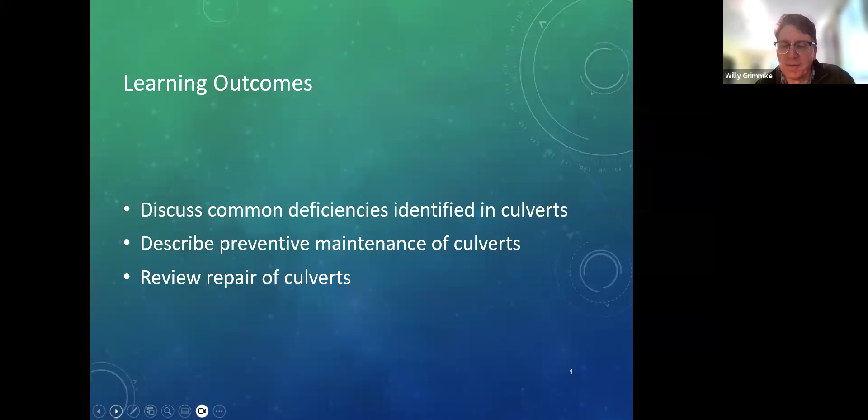So we're going to start out with some poll questions to get an idea of where we are and who's attending today. What's your primary job function? Are you a highway maintenance worker, highway maintenance supervisor, an engineer, or other? Okay, it looks like we have overwhelmingly engineers, as well as some others, and we've got about 15% from the highway maintenance community.

So next, who do you work for? Village, town, county, city, state, or private sector? Okay, we've got 4% village, 18% town, about a quarter county, 13% city, 15% state, and a quarter private sector. So we've got quite the variety here.

How long have you worked with culverts? Less than a year, 1 to 5 years, 5 to 10, 10 to 20, or over 20, lots of experience with culverts. Okay, so it looks like we've got some newbies. We got almost a third in the 1 to 5 category, and we've got almost a quarter in the over 20-year category.

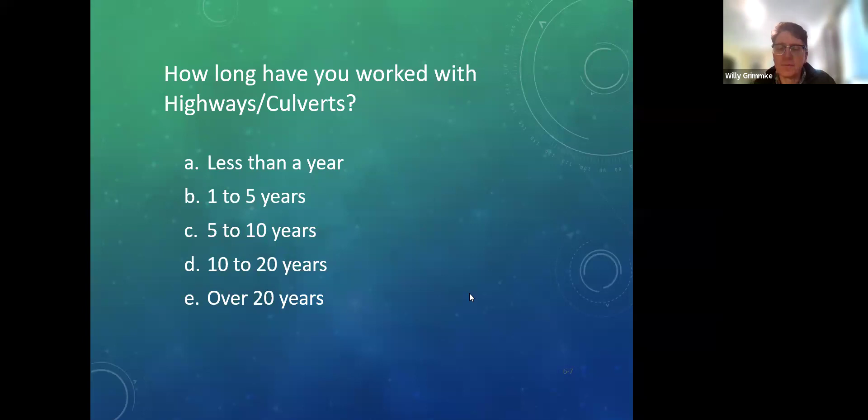So, how many culverts in the 5 to 20 foot span are in your system? If you're a public employee or you're responsible, is it none, 1 to 10, 10 to 25, 25 to 100, over 100, or I have no clue? Okay, so we've got over a third with over 100 in their inventory. We've got some with none, some with not sure, and then others with varying numbers.

Okay, so let's talk about culverts a little bit, and we're going to start out with some nomenclature so everybody's on a common knowledge base, so we know what we're talking about. Down at the bottom of the culvert, where the water flows, that's referred to as the invert. The top, the peak of the culvert, is referred to as the crown. The widest location is known as the spring line, and underneath the culvert between the invert and the spring line is an area called the haunch, which we're concerned about the bedding underneath, which is critical to supporting the culvert when it's installed.

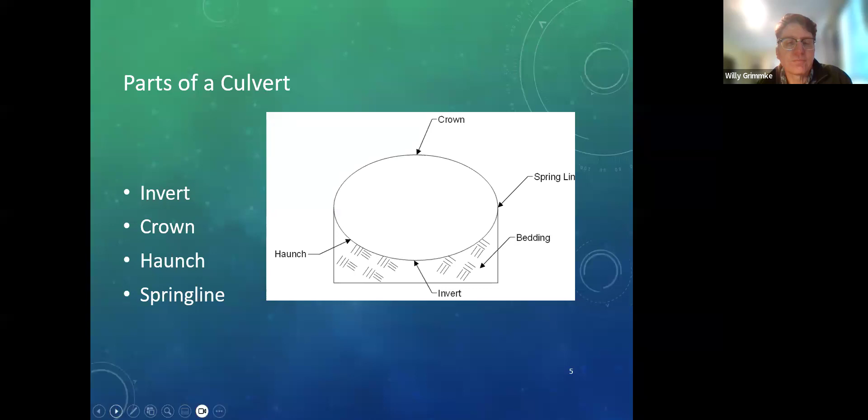In cross section, we have often, but not always, coming into the culvert, an apron. We may or may not have a toe or cutoff wall, which will prevent water from flowing in the soils and the bedding beneath the culvert.

Sometimes we will have wing walls. Sometimes we will have a head wall or parapet retaining the fill above the culvert. We will always have a barrel, which are the walls and top and bottom of the culvert.

Some culverts may have end sections in lieu of wing walls and aprons. Precast or prefabricated sections of culvert will have a joint that will extend radially around the culvert.

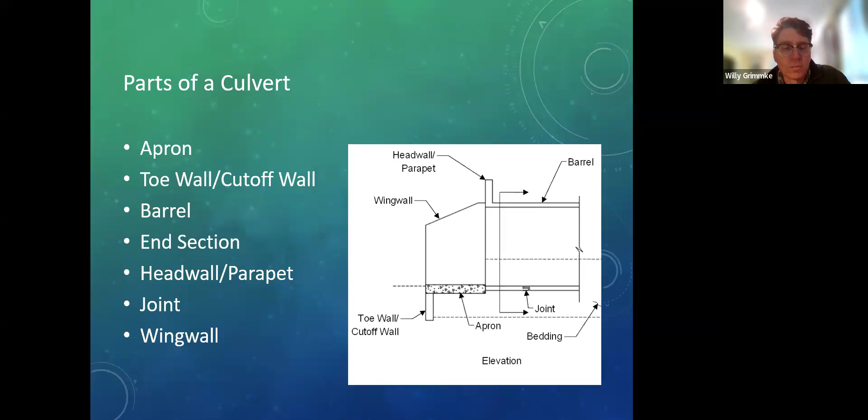Culverts come in a variety of shapes. They may be round, they may be elliptical, both horizontal as shown in the lower left, and sometimes there are vertical elliptical culverts, and these are dictated based on the geometry of the stream channel and what's crossing above and below. We may have box culverts, as shown in the center top photo and the center diagram.

And in the center diagram, we have a bottomless culvert, and those are becoming much more common with the environmental folks wanting us to retain a natural stream bottom as much as possible.

We may also have, as shown in the center bottom diagram, metal boxes. We may have bottomless metal arches, and we also may have plate arches or pipe arches, which is the odd kind of shape in the lower right.

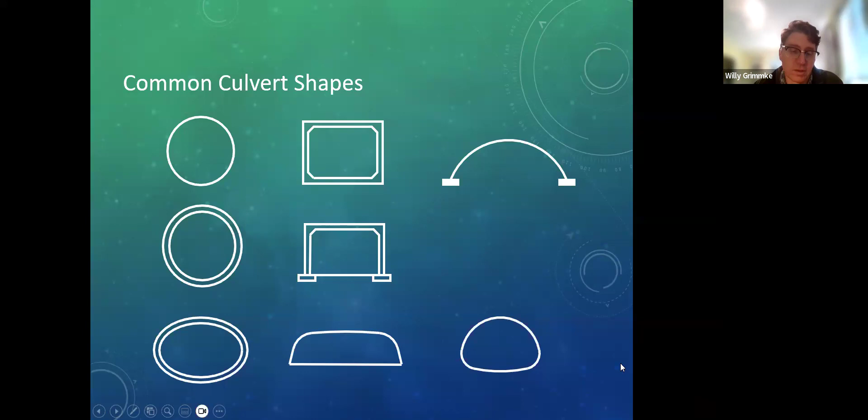Now, culvert materials. Common material is concrete. Concrete can come in a variety of shapes. It may be precast. It may be cast in place.

Concrete, but in and of itself, is rigid, and that provides the support. However, it needs to be adequately bedded, and in upcoming slides, we'll show some of the issues with bedding or poor bedding and what indications you'll see in culvert distress if the bedding is not done correctly.

Nice thing about concrete is it has smooth interior, so you get good hydraulic characteristics through it. For round concrete pipe, they're typically joints in 4 to 8 foot spacing, and sometimes concrete may be skewed, particularly with box culverts.

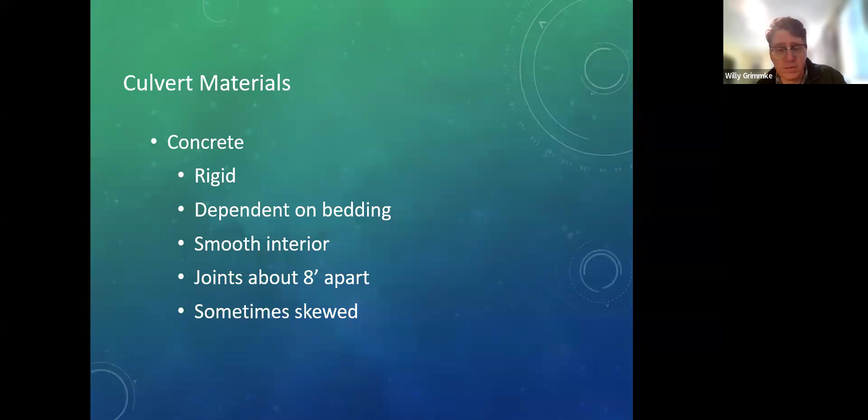Here's some photos of concrete types. We have round in the upper right, and we have a bottomless precast box on the lower right. We can use horizontal elliptical in low clearance situations. There are some manufacturers that make precast concrete arches, and cast in place concrete boxes are sometimes built also.

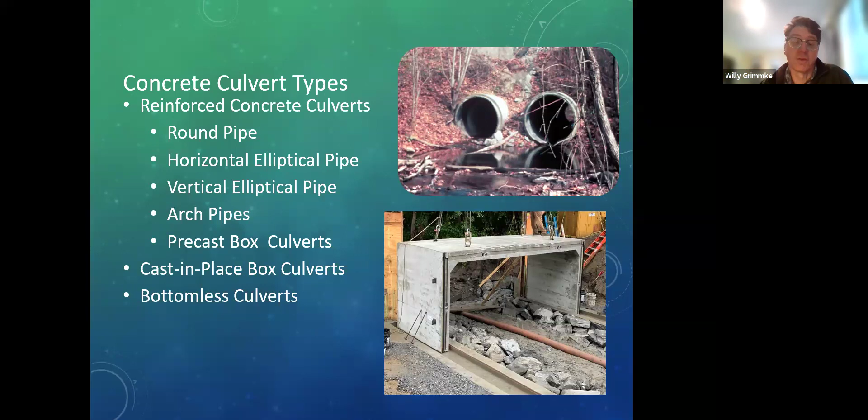We move on to culvert materials and corrugated metal, which is fairly common, although for smaller diameters, corrugated plastic or corrugated polyethylene is becoming more common.

In this particular case, the materials are flexible, and they will flex and bend with movement and settlement in the soil. This makes the installation and compaction of the surrounding soil critical for the long-term structural performance of the flexible culverts. The soil is actually providing the vast majority of the load carrying capacity, and the flexible culvert

is essentially acting as a form for the backfill and compaction of the soil. With the corrugated metal pipe, the corrugations provide a rough flow surface, which may reduce flow a little bit. Typically, the joints are about 20 feet apart

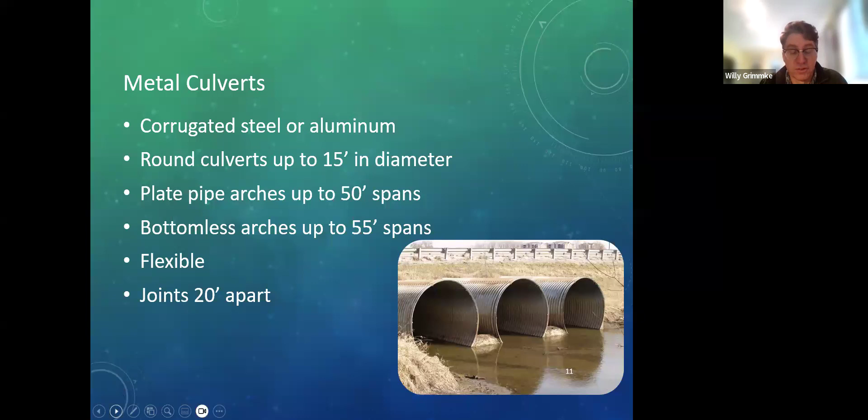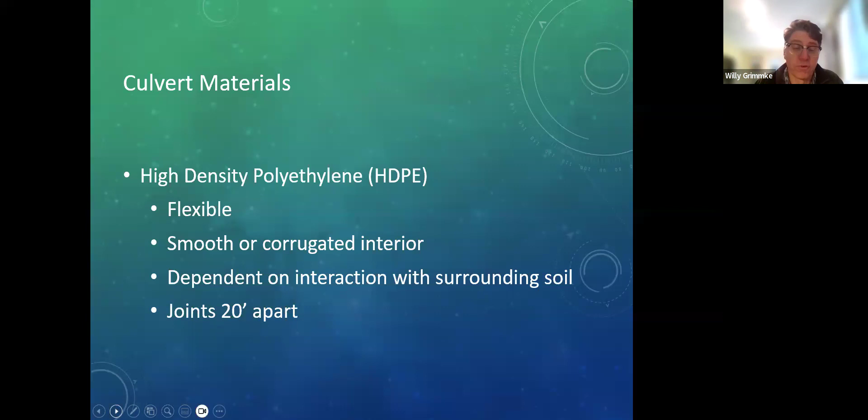I talked about polyethylene. Again, like metal, it's flexible. It may have smooth or corrugated interior, and very much like the metal, it is highly dependent on interaction with the surrounding soil. In both of those cases, during installation, soil compaction of both the bedding and backfill is critical to the long-term performance of your culvert pipe.

So I can't emphasize enough proper installation and maintenance necessary to make the culvert last as long as you're planning it to last. And proper maintenance can delay or prevent complete open cut replacement.

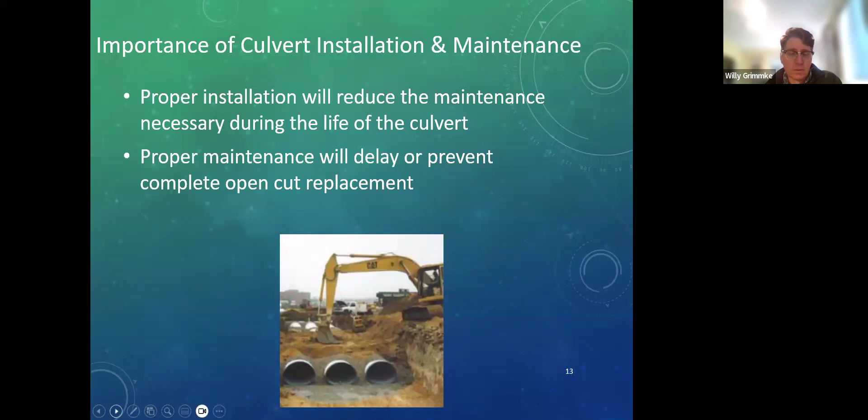Common defects that we often encounter in culverts are debris and siltation, which can impair the ability of your culvert to pass water as it's supposed to. We can get leaking joints, and those leaking joints can lead to settlement and sinkholes. We can get scour and undermining at the inlets and outlets, due to how the culvert is situated in the channel, or due to accumulation of debris at the inlet and outlet.

We can get damaged coatings in the case of metal pipes. They're typically galvanized, and that coating protects the pipe from corrosion and other deterioration. We can get invert damage or deterioration, which may be due to corrosion or damaged coatings, and in concrete and plastic pipes, it could be due to abrasion based on the bed load.

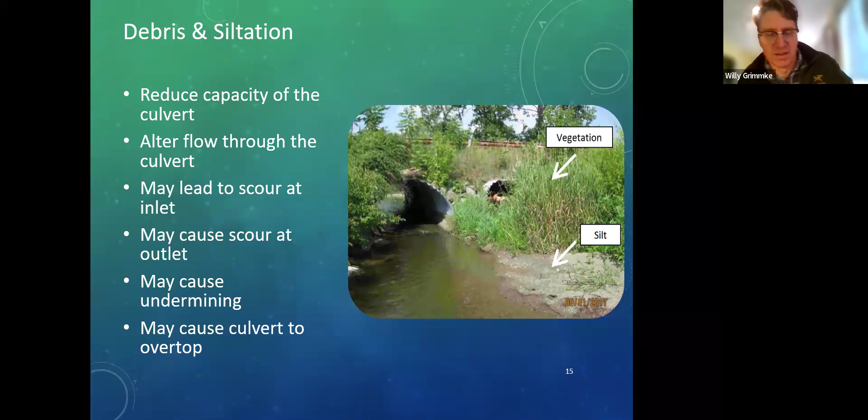We may be getting soil in our culverts, and if we get soil in our culverts, it can and will reduce waterway capacity. Now, there may be a few causes, and it may be on purpose. The causes could be hydraulics of the stream, where we've got some aggradation and the stream is tending to deposit soil in the culvert. We may have joints that are failing or an invert that's failing, and that could be causing soil in the culvert. However, we may have installed it that way, with an oversized culvert that's embedded to create as much as possible a natural stream bottom in the culvert.

You need to know whether this was accidental or on purpose. And if it was on purpose and the culvert's sized adequately for soils in the bottom and a natural bottom, that's fine. If it wasn't, and you have something going on, you're probably going to need to clean it out with some regularity so it will continue to accommodate the flow it's designed for.

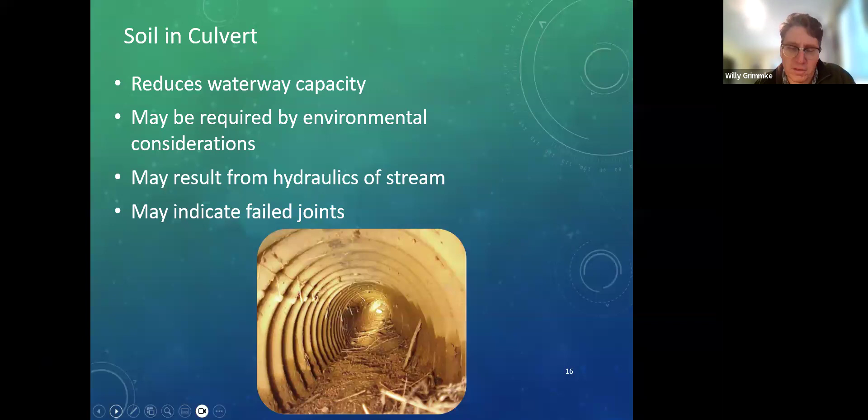Now, debris accumulating in a culvert can be problematic. This was a case where there was a release due to a dam failure, and it carried a lot of debris, which plugged one of the barrels in a box culvert pier. You can see there's a fuel oil tank as well as a lot of vegetation jammed up underneath here.

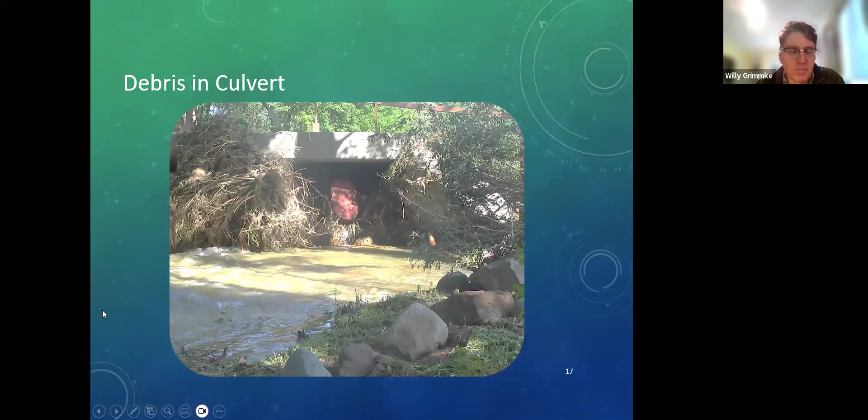Now, I cannot say definitively that had the debris not accumulated there and clogged it, the culvert would not have overtopped, because it was a pretty significant release. However, the debris did increase the probability of overtopping, and as a result, we now have a crossing that's no longer working, and that required emergency work on the part of New York State DOT at the time, to repair that and get the road open.

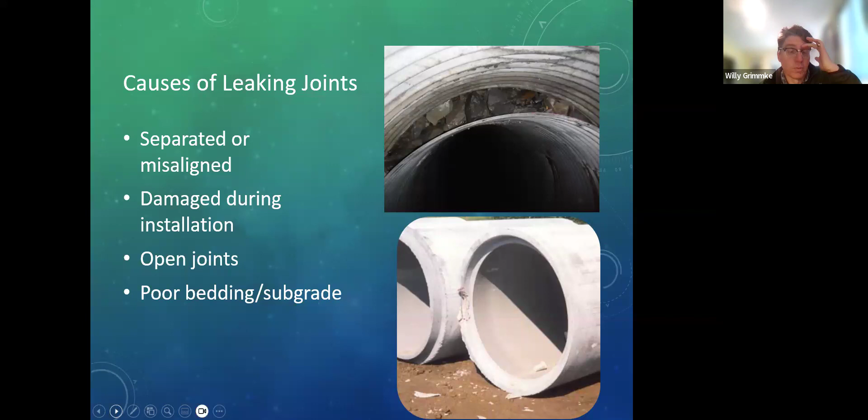Now, the joints may also be open due to poor bedding or subgrade, or it may be a situation where we've got a culvert under a fairly substantial fill, and the soils that the culvert is set on settled as a result of that fill. So we want to be conscious of that when setting culverts, because if we have a lot of settlement, joints could open up.

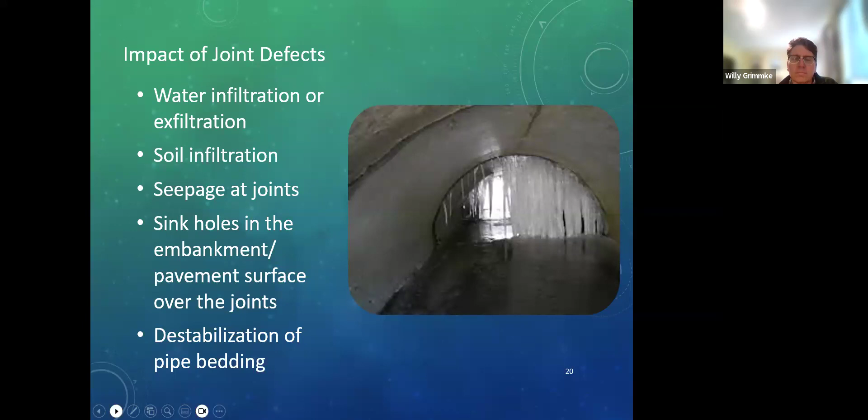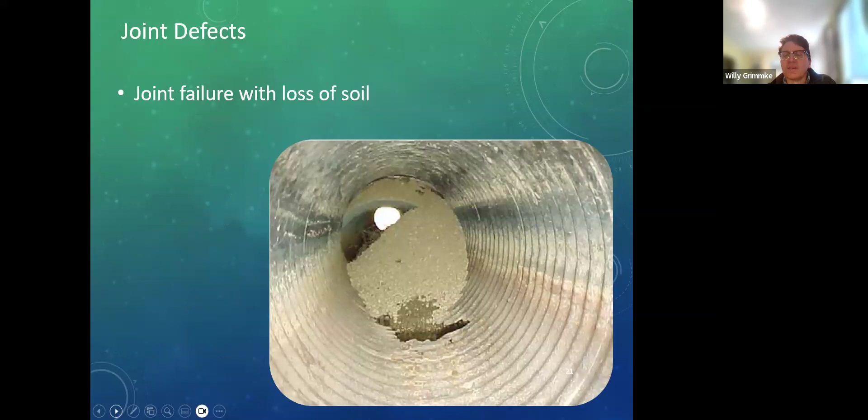So here's a case where we had a sinkhole, and the road was recently paved, and the vibration from the paving operation may have loosened up some joints. With the subsequent rains, soil washed out, and that little 2-inch diameter hole was a 4-foot diameter sinkhole underneath the pavement where soil was washing through.

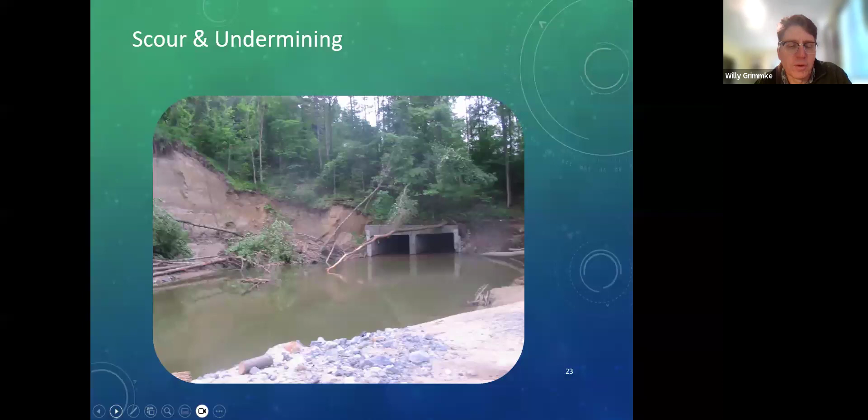We could get scour and undermining, and this was discharged downstream of a box culvert, and the heavy flows coming out of this box culvert washed out this bank down below. So often with our culverts, we'll want to do something to abate our flows a little bit, calm things down a little bit, so we don't have erosion problems.

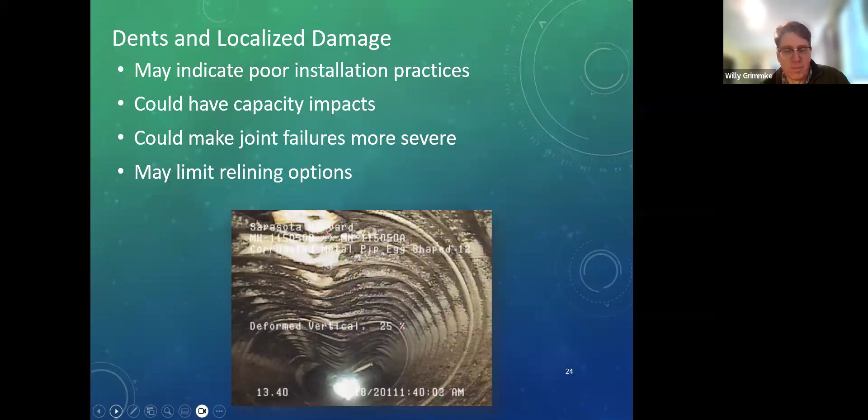We can have dents and localized damage, often due to poor installation practices. This particular case, it looks like they backed the track hoe over it, and this can have significant capacity impacts, as it may squeeze down your waterway opening. This can also limit our relining options. If we can't dig it up and replace it, slip lining isn't something we're going to be able to feasibly do. And here's another pipe with a deformation.

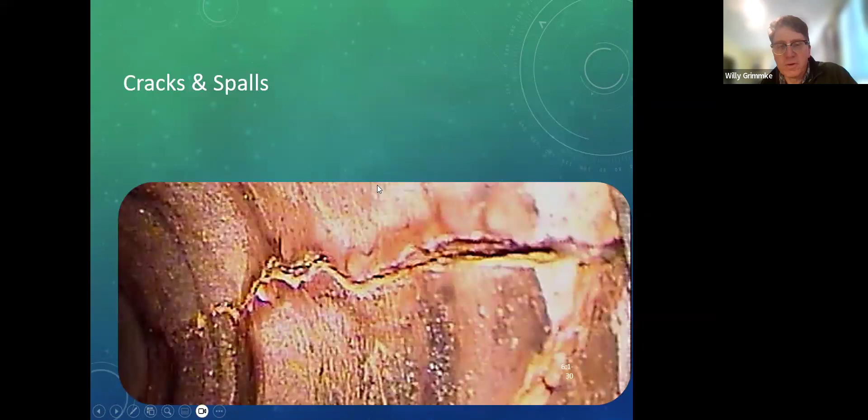With concrete pipes, we can get cracks and spalls. Now, how the cracking exhibits itself indicates what's going on. If we have longitudinal cracks at 12, 3, 6, and 9 o'clock, it's probably due to poor side support. If we have longitudinal cracks just outside the inverts, but parallel, it would be due to poor haunch support. And then with uniform side support, we're unlikely to get longitudinal cracking.

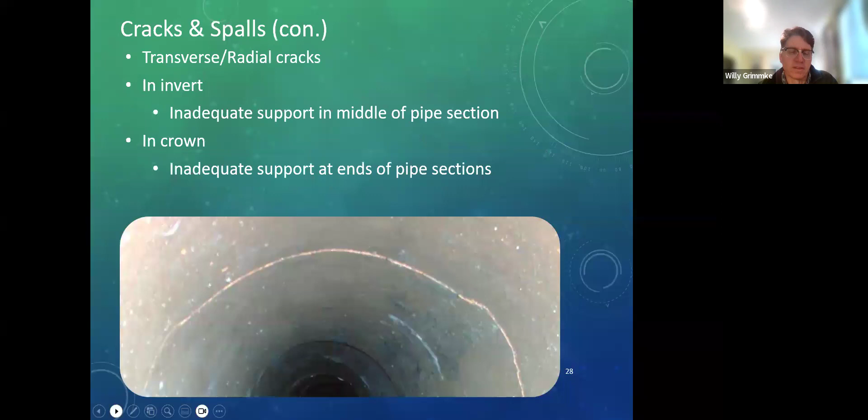Radial cracking or transverse cracking, the location will depend on where we're lacking support. If it's in the invert, we have poor support in the middle of the pipe section. If it's in the crown, we've got inadequate support at the ends, as you can see in this illustration. If uniformly supported, it should sit well. If we don't have support in the middle of the pipe between the bells, we'll get a broken belly type crack. And if the ends are not supported, we'll get a broken back type crack up in the crown of the pipe.

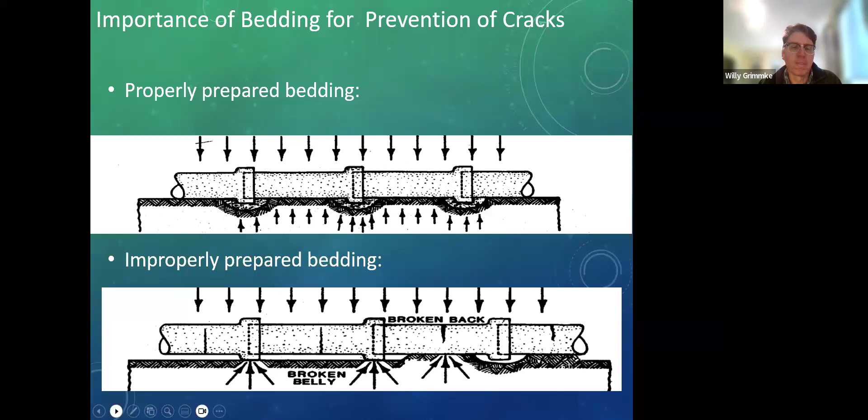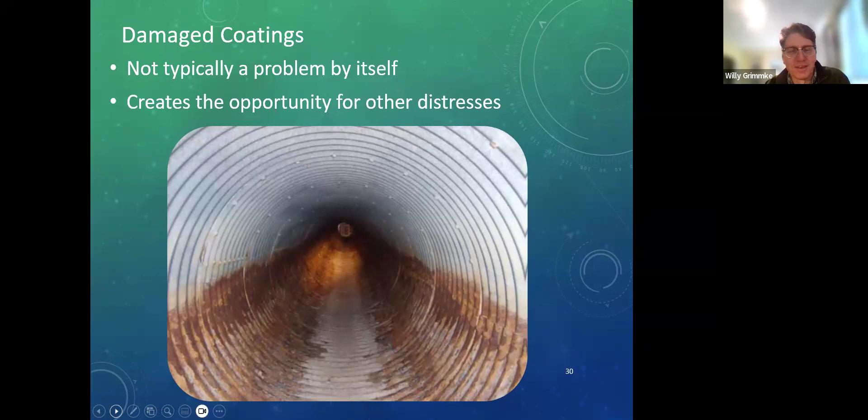Damaged coatings. The damage of the coating in and of itself is not typically a problem. However, it will lead to problems with corrosion. So corrosion can get started when the galvanization is gone. And I bet you can guess from the photo where the normal high water line is for flow in this particular culvert, because it looks like from the spring line up, the galvanization is pretty close to pristine, and below, not so much.

Once you have loss of coatings, corrosion will often start, and that will exhibit itself as pitting in the metal. Corrosion is typically due to acidic or saline water, or if your metal pipe is buried in soils with low electrical resistivity. One of the other things that can exacerbate corrosion is loss of coatings due to abrasive bed loads. If there's a lot of sand and gravel washing down the creek at high velocity and chipping the galvanization off, corrosion will get going.

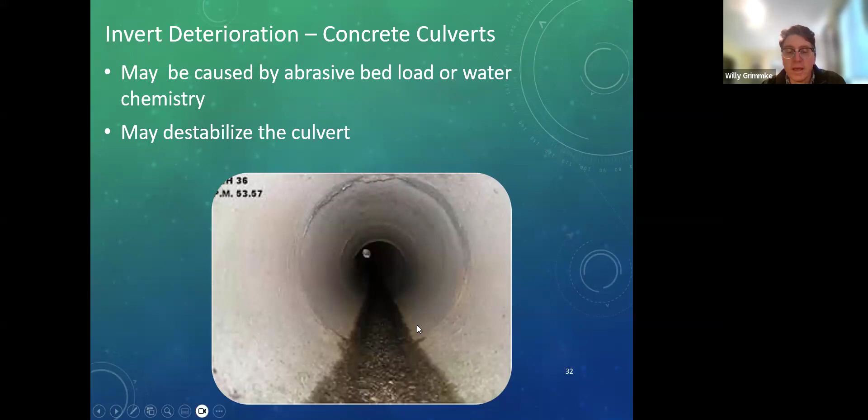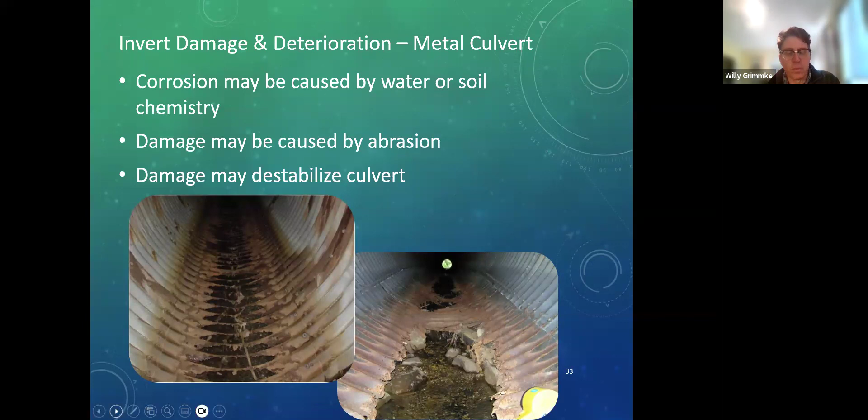And that can lead to invert deterioration, both in concrete and metal pipes. It can be caused, in concrete, by abrasion in the water or water chemistry, and over time, this deterioration can destabilize the culvert. In metal, water or soil chemistry, damaged by abrasion, and again, it'll destabilize the culvert because it's discontinuous and there's nothing supporting the bottom, which can lead to collapse in time.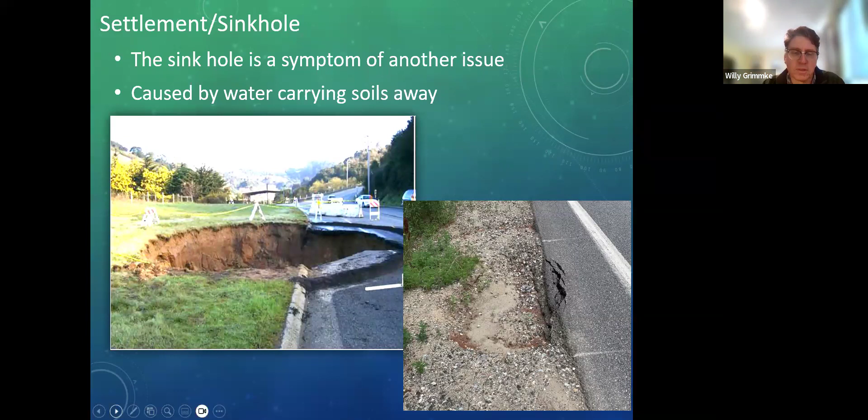If we have settlements or sinkholes, as shown in the photos, it's a problem for our roadway, but that's an indication that we have something going on with our culverts that's taking the soils away. So it may be something like a failed invert or failed joints. We'll need to deal with that problem first before we deal with the actual sinkhole repair. Let's get to the root cause of the issue.

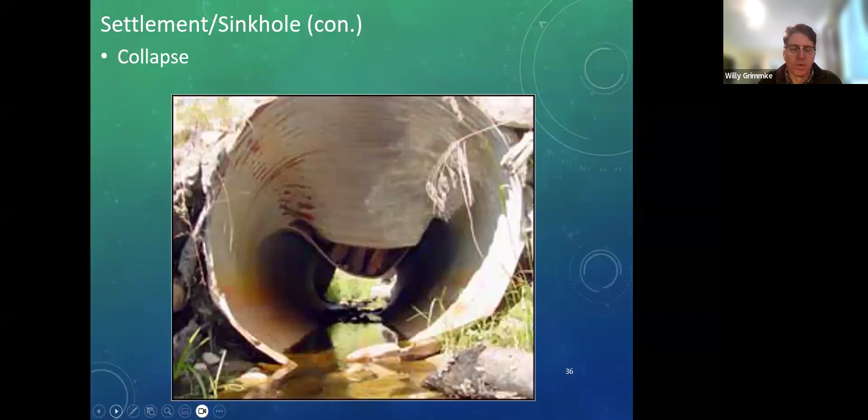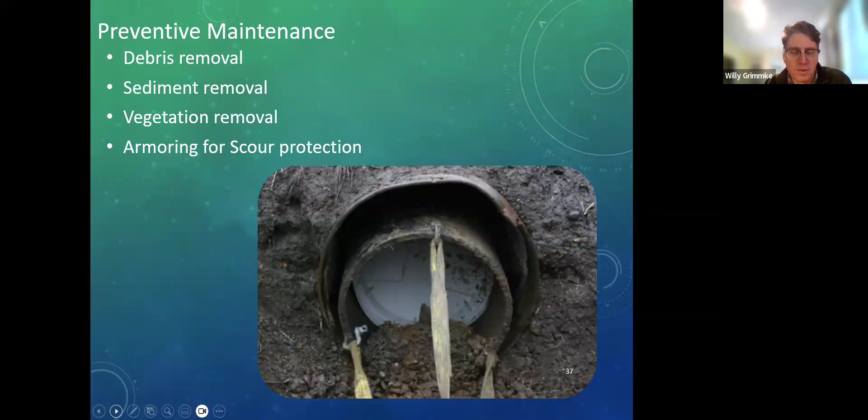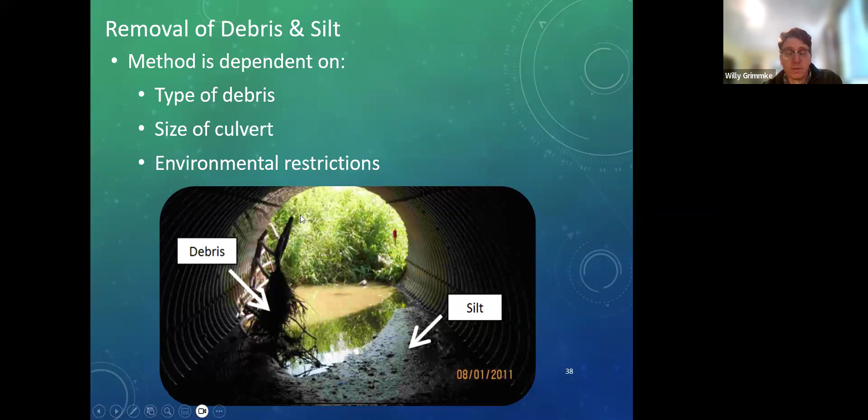So preventive maintenance: one of the things we want to do is get rid of debris, sediment, vegetation, and maybe armor for scour protection. As we talked, the debris will impair our waterway capacity. So how we're getting rid of silt and debris will depend on what it is, how much room we have to work, and what our environmental restrictions are.

So things we want to consider: environmental. Do we need to contain that silt and debris, or do we have an area to capture it? Is it a confined space? Do we have contaminants in the water?

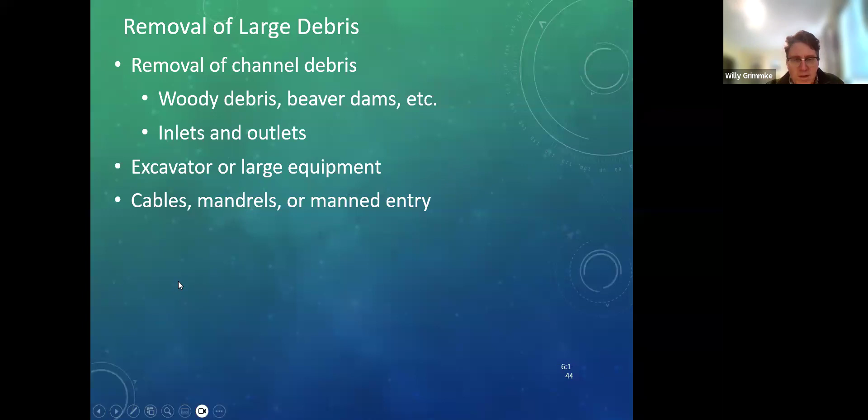So removal of large debris - do we have things like beaver dams, logs, woody debris? That often accumulates at the inlets and outlets, and often we can use an excavator or large equipment for that. Sometimes we have to go with manned entry. Sometimes we use a cable, grapple, mandrel to unplug culverts.

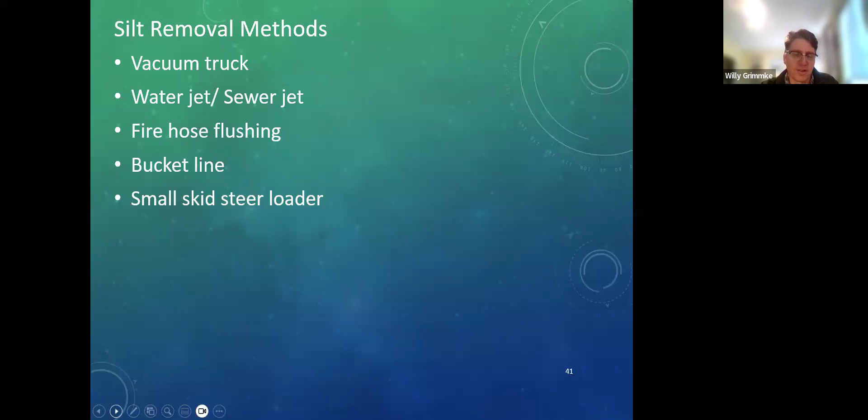If we have silt and smaller spaces, we may need to rely on a vacuum truck, a water or sewer jet, flushing it out with a fire hose, using a bucket line. If we have enough space and the appropriate permits or dry conditions to work, we can use a skid steer loader. I was talking with a colleague who was the bridge engineer from the state of Colorado, and he was telling me his maintenance folks, as much as possible on state roads where they had room, like to have the box culverts sized large enough that they could fit a skid steer in to remove debris.

If we have scour at the outlet, it depends on the severity of the scour how we repair it. You generally want a hydraulics engineer consulting for the appropriate methods and materials. If we're putting in riprap, we want to make sure it's large enough that it's not going to wash downstream in the next storm event. And if we're placing any kind of fill, environmental permits may be required.

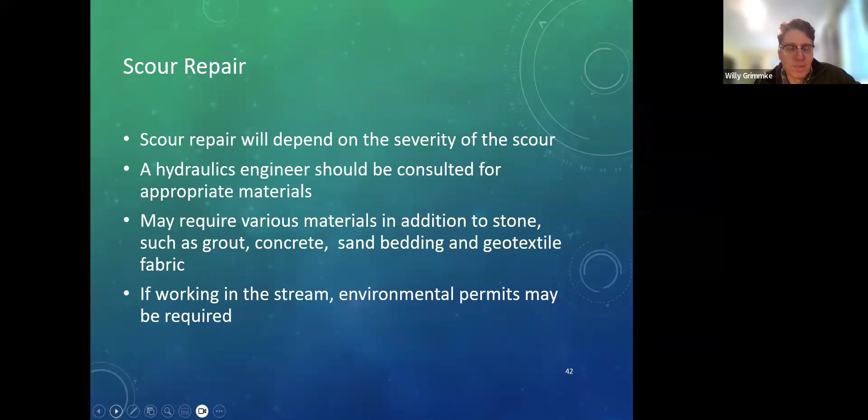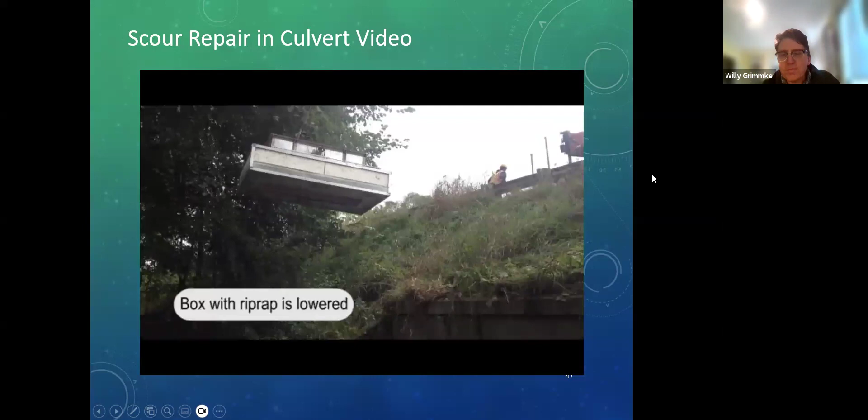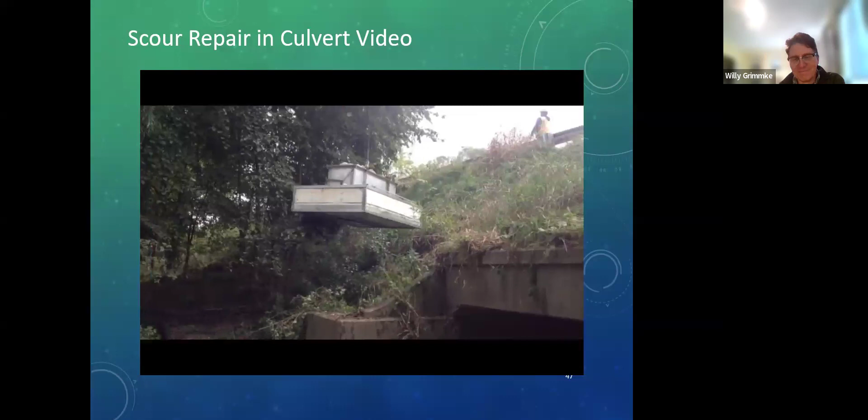Here's a video from Michigan DOT. They MacGyvered and built their own piece of equipment for placing riprap in a bottomless culvert. They've got this box that they can lower, because you're not going to get anything inside a box culvert with a track hoe.

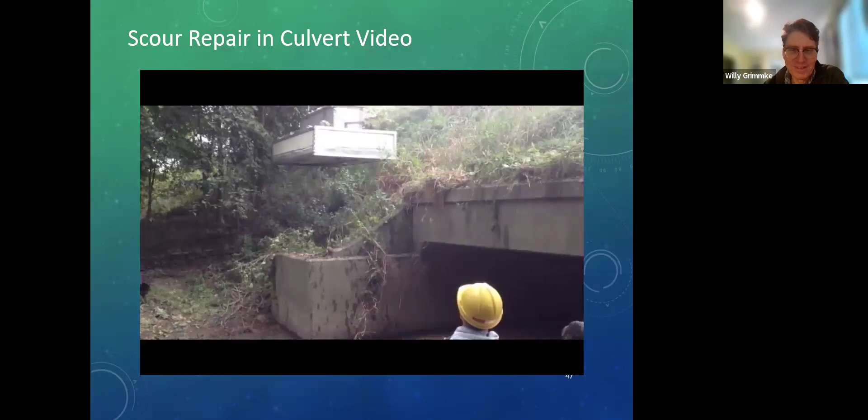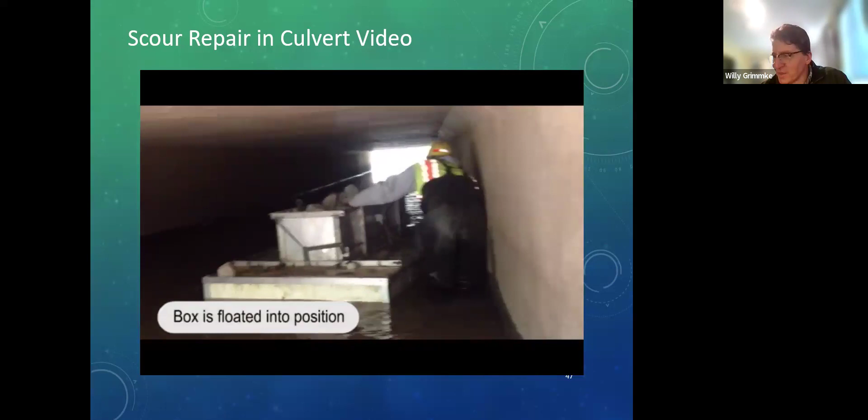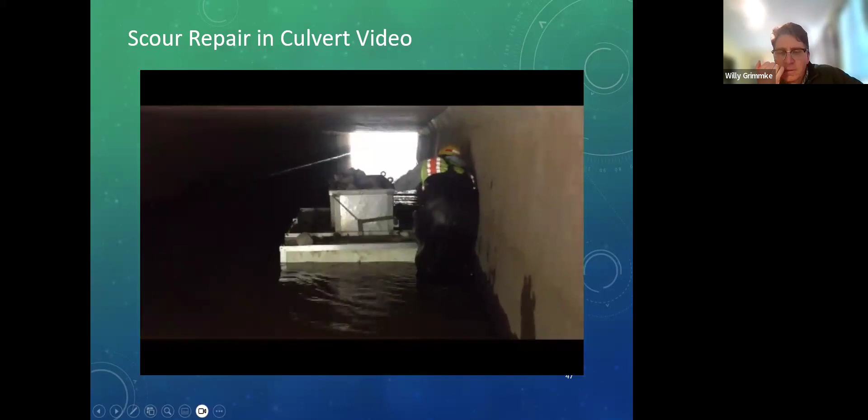And now it's being floated into position, and dropped into place.

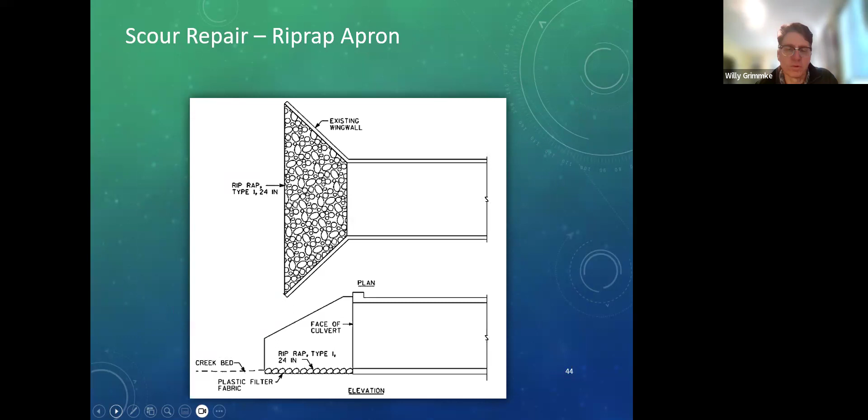That's for internally. For externally at the inlet and outlet, riprap can be placed, which will minimize or reduce both fill-in and future formation of scour holes at the inlet and outlet. In some cases, a concrete apron may be what's called for rather than riprap.

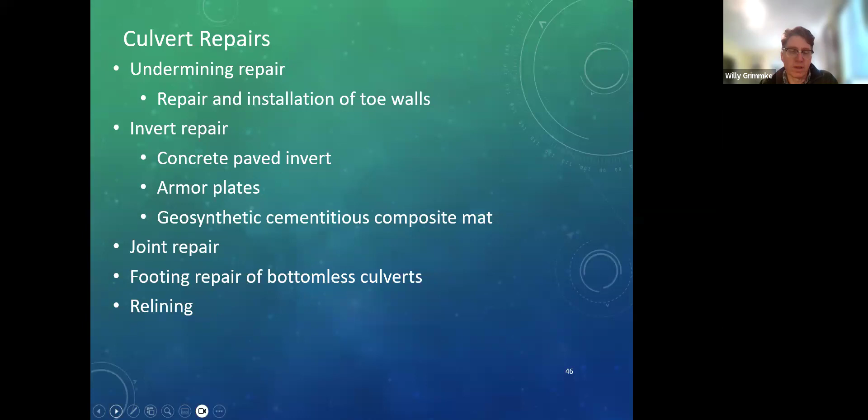If you have undermining in your culvert, or it's starting to undermine, or your scour hole is starting to advance under the culvert, installation of toe or cutoff walls may be called for to prevent or abate that. We may want to repair our inverts. We may look at joint repairs. If we have issues with joints, we may need to repair footings of bottomless culverts, and we can explore relining where we're having overall issues with the culverts.

So toe or cutoff walls can be installed in scour prone areas and prevent scour from advancing under the culvert. It won't prevent the scour hole, but it will keep it from undermining the culvert. It's got to be designed to extend well below the expected scour depth, and it will prevent piping beneath the culvert.

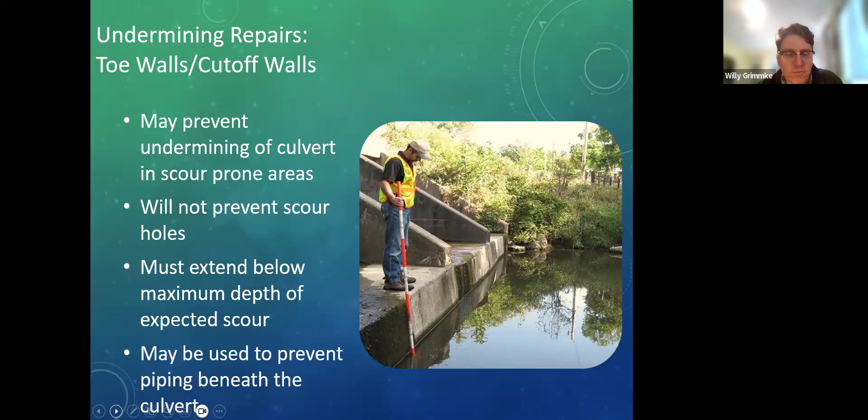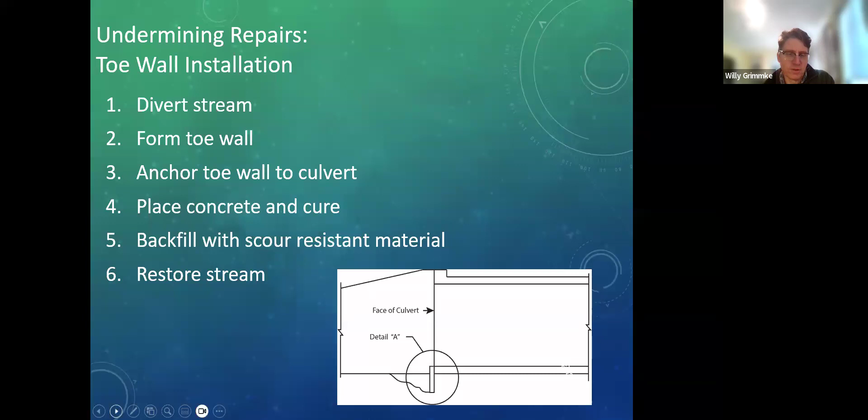So the basic procedure for that: the stream gets diverted, any backfill gets placed underneath, toe wall gets anchored to the culvert, formed and placed, backfilled with scour resistant material, and the stream gets restored.

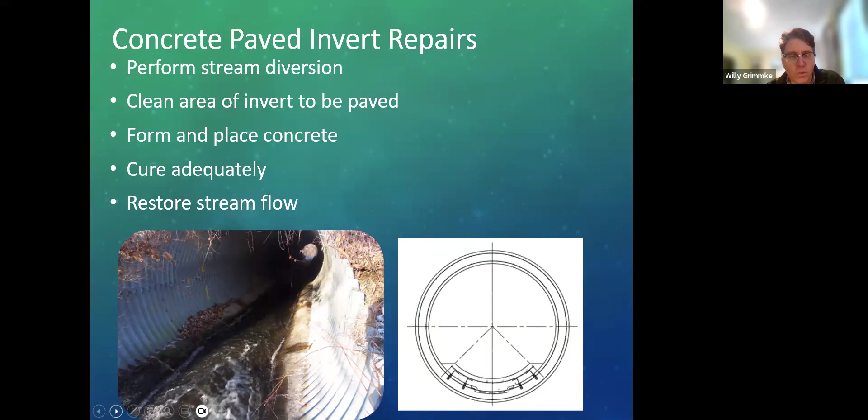If we have invert repairs, we can do a concrete paved invert, armor plates, or geosynthetic cementitious composite mat. For concrete paved inverts, the stream gets diverted, the invert gets cleaned and repaired, and concrete is placed, cured, and stream flow is restored. This is one New York State DOT did on New York State Route 29.

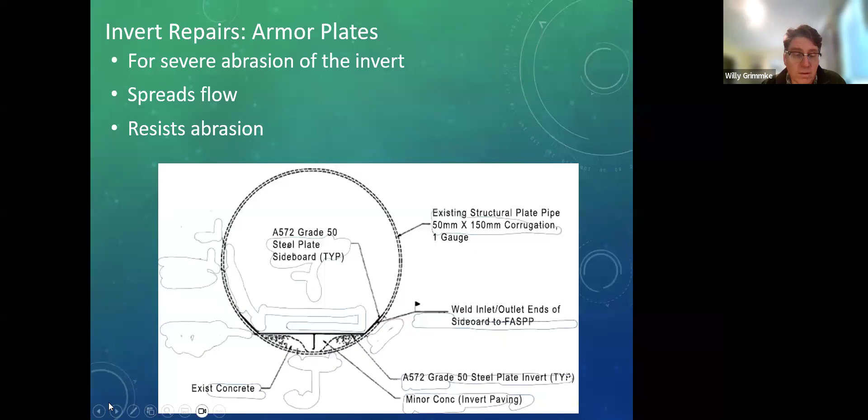In some cases, if there's abrasion of the invert, a steel plate can be placed in the bottom. This is a California DOT detail. It will spread the flow, so it may not be a palatable solution vis-a-vis DEC, because you won't have a concentrated flow in low flow conditions, but it will resist abrasion and extend the life of your invert. And this is showing an installation being performed with the armor plate in the bottom and up the sides.

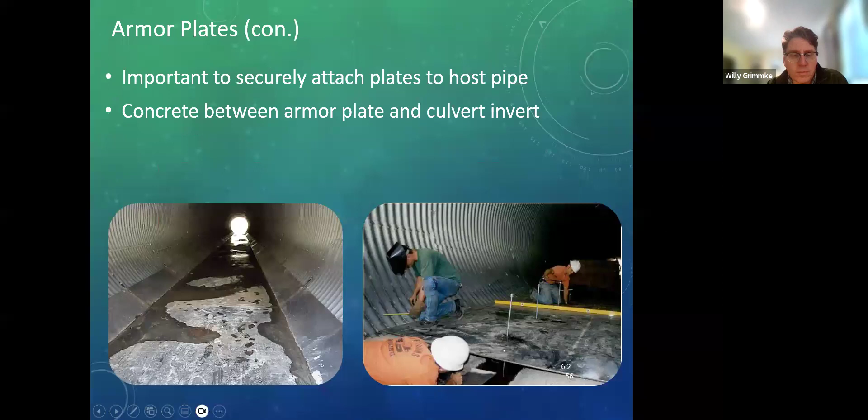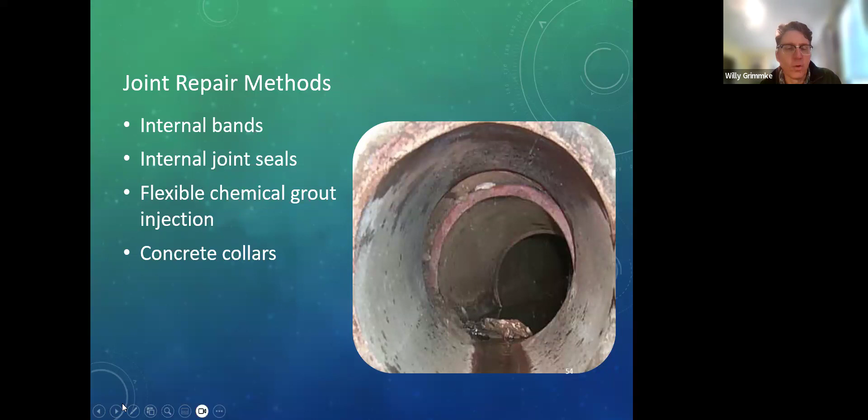If you have leaking joints, you may want to explore joint repair methods to plug them. This is an extreme case, and it may be beyond any of the reasonable joint repair methods. But internal bands and internal joint seals can be used. Flexible chemical grout injection or concrete collars can also be used.

Internal bands were part of a relining project, but these internal bands are binding the joints together. They are soil tight, not necessarily watertight. The bands are placed over the joint and they are tightened with threaded rods.

With this type of installation, you'll want to get your bolts or threading up out of the invert as much as possible, and there's still a possibility or probability that under high flow conditions they can snag debris.

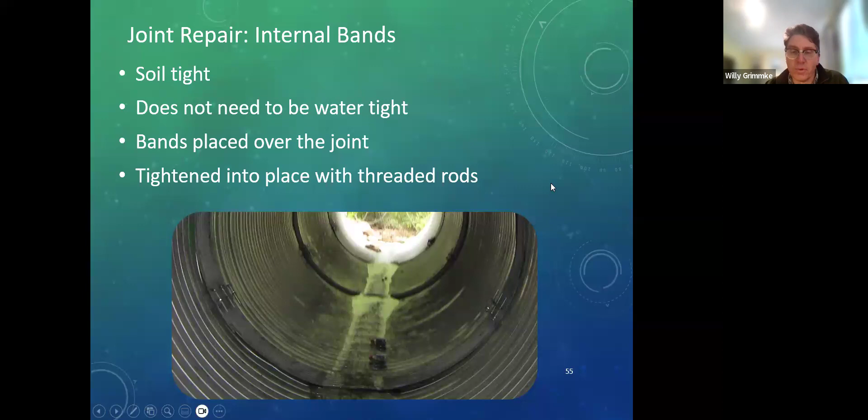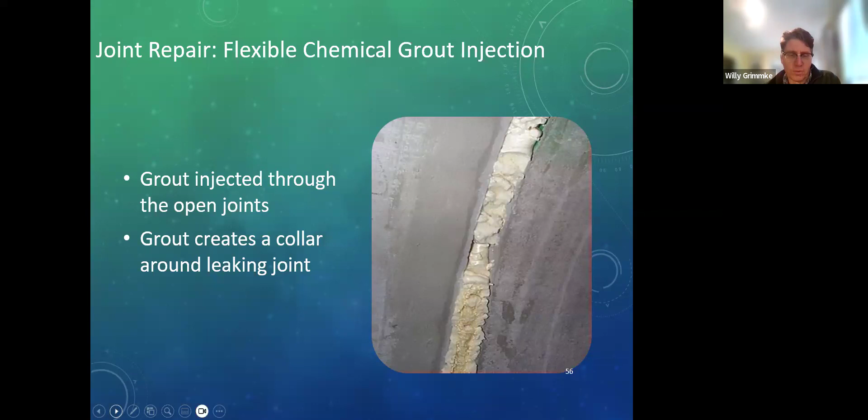Grout can be injected through open joints, or polyurethane foam used to seal them. I've seen this installation used in settlement situations, and it provided a good watertight fix to keep the joints from leaking and keep soil from continuing to flow into the concrete culvert.

And then if you have an opportunity, you can dig, expose, and pour a concrete collar around the leaking joint, an open joint, and that will also provide a seal. Typically, with the concrete collar, you would want to wrap the opening with geotextile or something like it to prevent the concrete from entering into the culvert while you're placing it.

Relining culverts. There are a number of options for relining that can include slip lining, shotcrete or spin cast, depending on the size, or cured in place pipe.

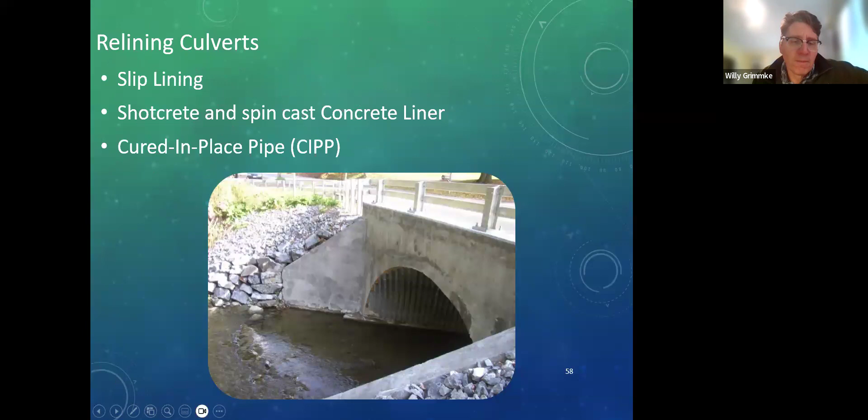Slip lining materials may include corrugated metal pipe, a corrugated metal pipe plate arch, smooth interior metal pipe, which is what we have here, or high density polyethylene. In all cases, we're putting a smaller pipe inside the existing pipe, and that will reduce our hydraulic capacity.

But in many cases, we can either deal with that loss of capacity, or in other cases, with a smooth interior metal or polyethylene pipe, going from a corrugated to a smooth will help minimize the reduction in hydraulic capacity, depending on the design and performance of the culvert.

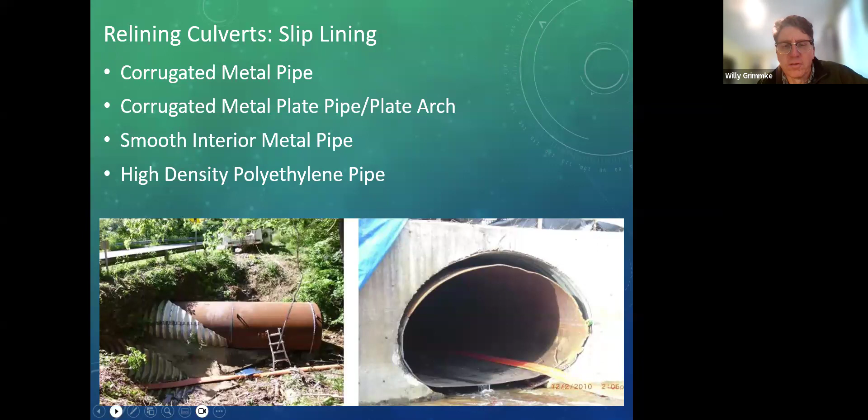This series of photos shows our Washington County crew slip lining a new corrugated pipe arch in an existing bottomless pipe arch on one of our county roads. This was a plate arch, and you can see individual plates were bolted together.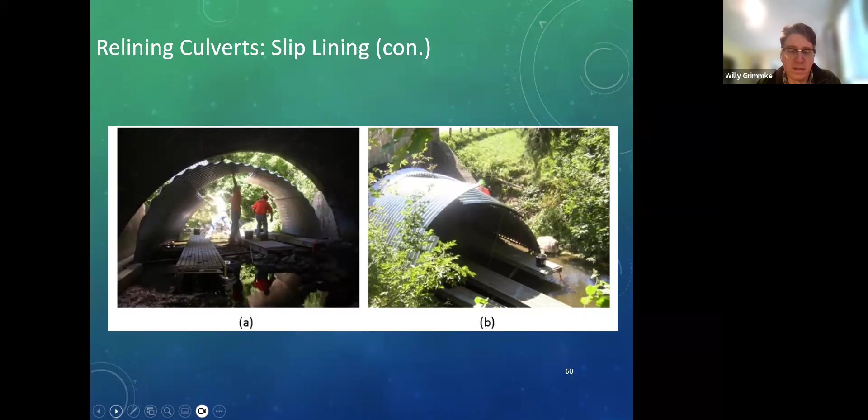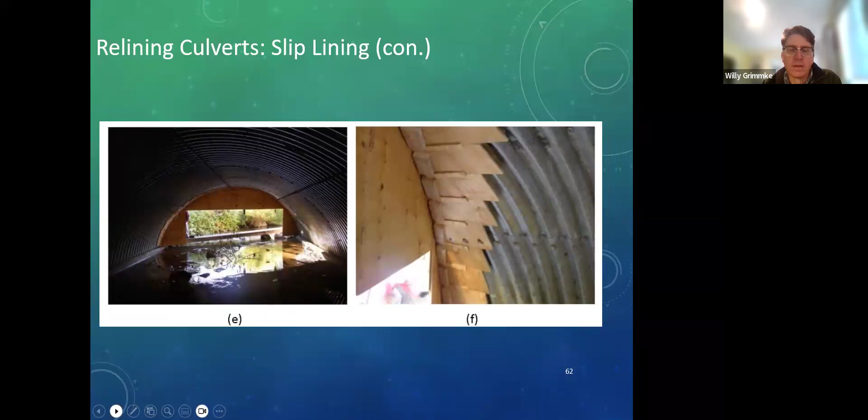And then we had the opportunity to use self-consolidating concrete from the top, and we cut into the top of the old culvert and basically put a port in to grout it. And in the photo below, we have a spiral ribbed metal pipe, which is a much smoother lining.

And that was slid into place. And you can see in the photos we have grout ports, and those were used to grout the space between the existing and the new liner. And now we have a new basically corrugated steel sandwich.

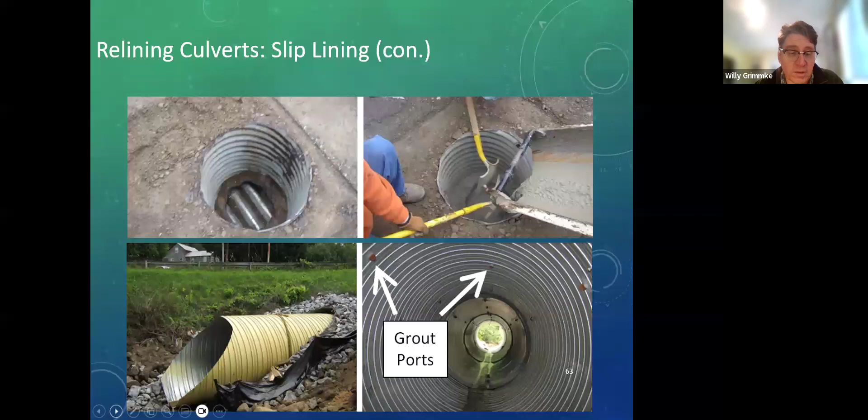Here's a photo of a smooth polyethylene pipe liner. This was a much smaller diameter, and the pipes in that annular space are what were used to inject the grout.

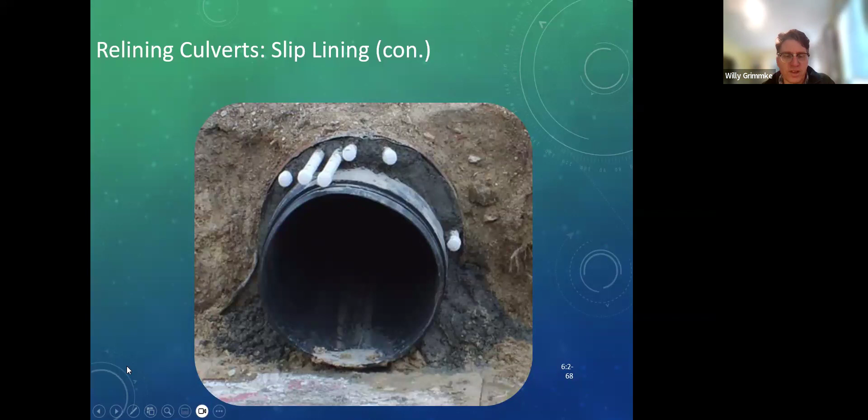If you have some distortions, a concrete interior can be used. Basically, it provides a uniform thickness over the whole interior of the pipe.

The photo shows spin casting, which is basically a small sled that projects concrete, essentially shotcrete, onto the interior of the pipe. This system is much more forgiving of distortions than slip lining, but you have to clean and grout any voids before you start.

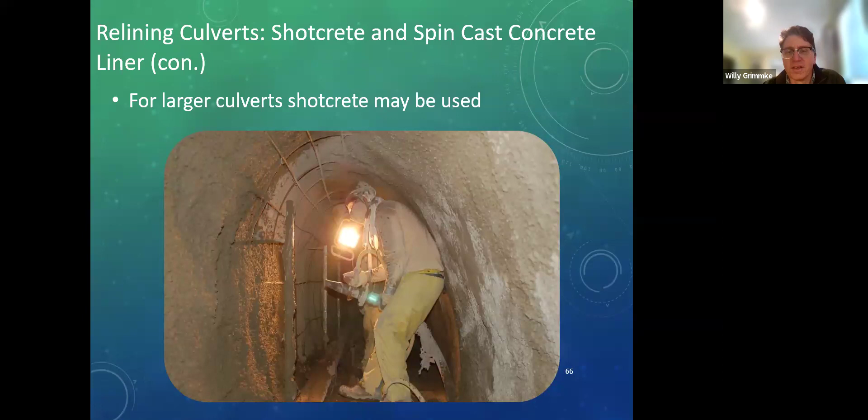And if you have a larger pipe where you have the space to operate, the interior can be shotcreted, but you have to have the room to work. Otherwise, spin casting and dragging the sled through may be the more appropriate fix.

I don't know if anybody has had exposure to cured-in-place pipe. Basically, this is a felt liner, a polyester felt liner impregnated with an epoxy resin. It's installed using water or air pressure, pushing that liner up against the walls of the existing culvert, and it's cured with hot air or hot water. It'll take the culvert out of service while it's happening.

But once it's cured, you have a brand new, basically polyester pipe. We recently used this on a number of culvert crossings on Quaker Road in Warren County this past year, because the road was very busy and could not be easily taken out of service for open cutting. It's a little more expensive, but in many cases it's cheaper than fooling around with deep cuts.

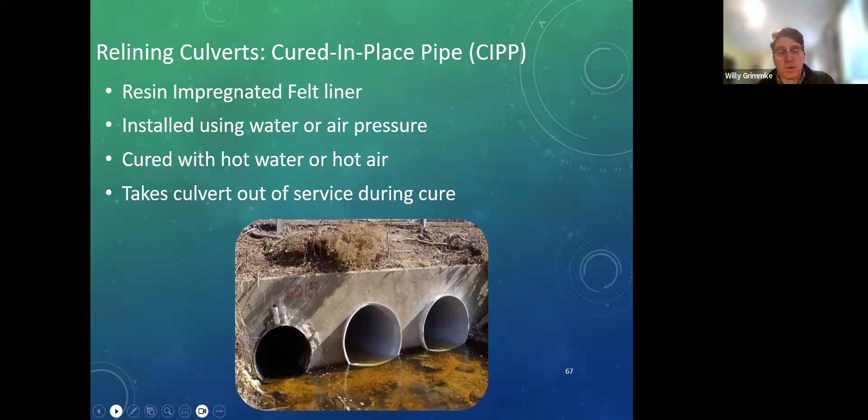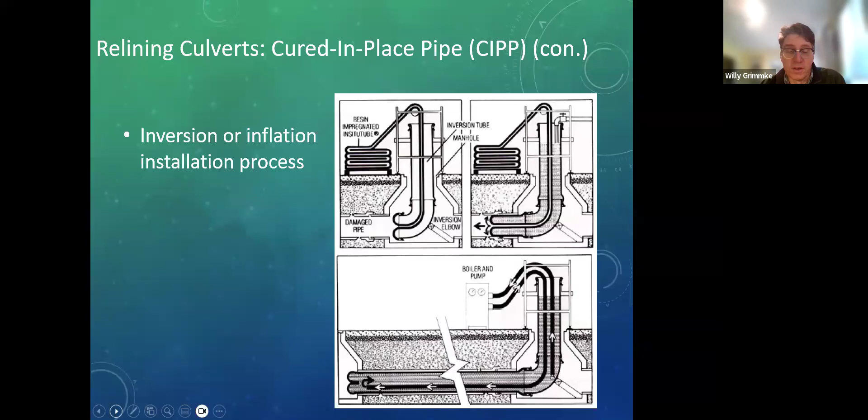This process was originally developed for sewer pipes, but it can go up to about 6 feet or so in diameter. The tube is inverted and often pushed into place with water, and the water holds it against the existing pipe while it's heated and allowed to cure. Then you have a brand new, very smooth liner. This is how the insertion process looks at the outlet end.

So if you're doing footing repairs to bottomless pipes, it's similar to doing other concrete repairs, but the real challenge is tight spaces, making equipment use difficult. Similar to the photo with that arch lining, getting in there to pour that footing was a challenge, and it was a lot of handwork and manual labor.

So what you'll need to do is divert the stream around away from one of the footings, make sure you get down to sound concrete, and make sure repairs extend below scour depth. Here's a case in progress - we have a bypass pipe.

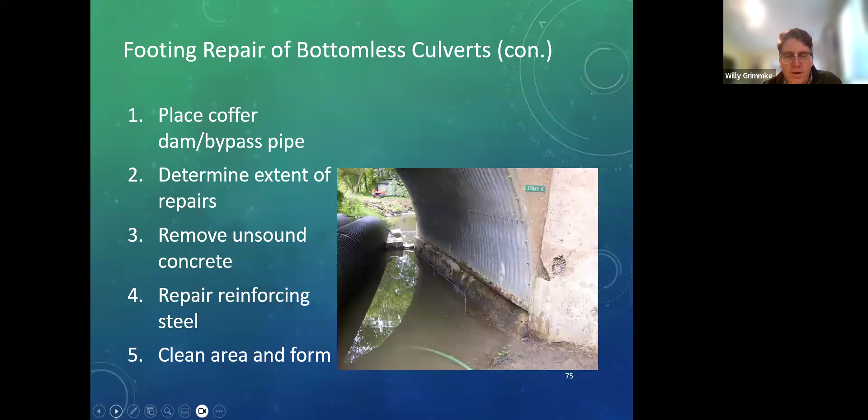Determine the extent of repairs, install rebar, clean and form, then place bonding agent, place concrete, cure the concrete, and then reestablish the stream.

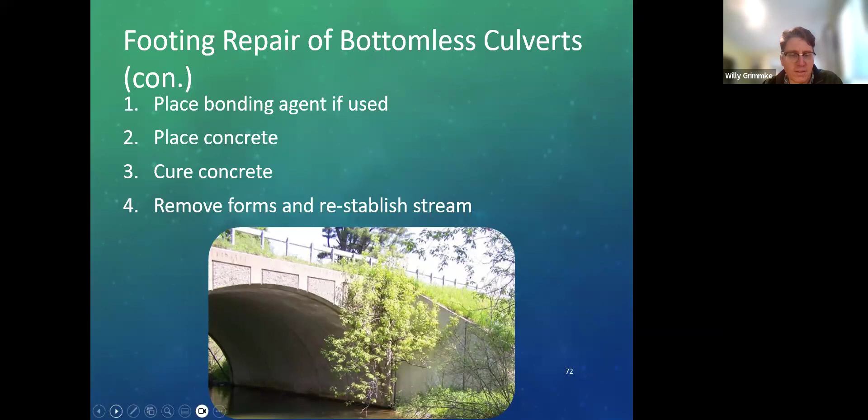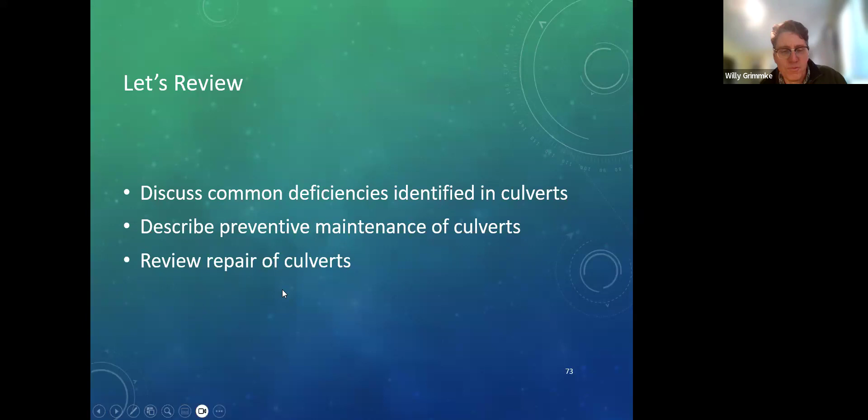So in summary, we've discussed a lot of common deficiencies in culverts, including coatings, joints, cracks, and debris. We've described preventive maintenance, basically cleaning and repairs of joints, and we've reviewed repair of culverts, including linings.

So now we're going to move on to our review questions. Corrosion in metal pipes can lead to which of the following deficiencies: invert damage, deformation, undermining, or all of the above?

Okay, so the answer we're looking for is all of the above. It can lead to undermining as we get perforations, invert damage, and deformation as we lose support.

Next question: What would be a preventative maintenance method for prevention of scour? Placement of riprap, installation of toe or cutoff wall, slip lining or cured-in-place pipe, installation of geosynthetic composite mat, A and B only, or all of the above?

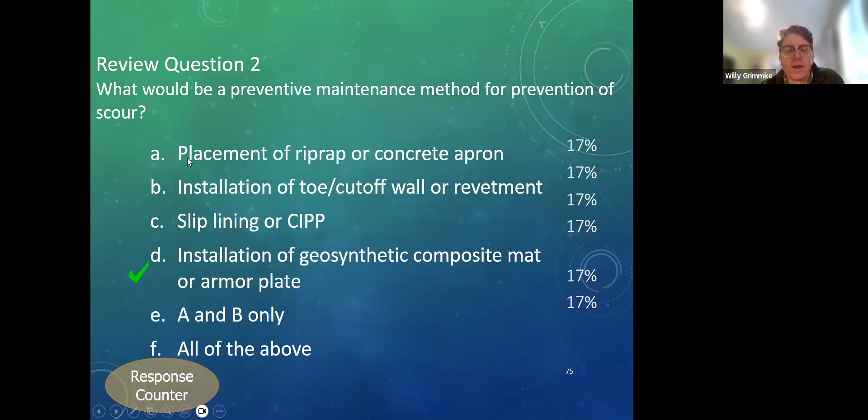So the answer we were looking for is A and B. D was not the answer we were looking for.

So, which is not a viable method for lining a culvert with significant deformations? Cured in place, shotcrete, slip lining, or none of the above?

Okay, so cured-in-place and shotcrete will both work if you have some deformations in your pipe because they are somewhat forgiving of those - they will go over and around them. Slip lining is going to be a lot less forgiving, and if you have deformations, that will not work. I'll caveat that by saying, if it's really significant, you're not going to do any lining option - you're going to replace it.

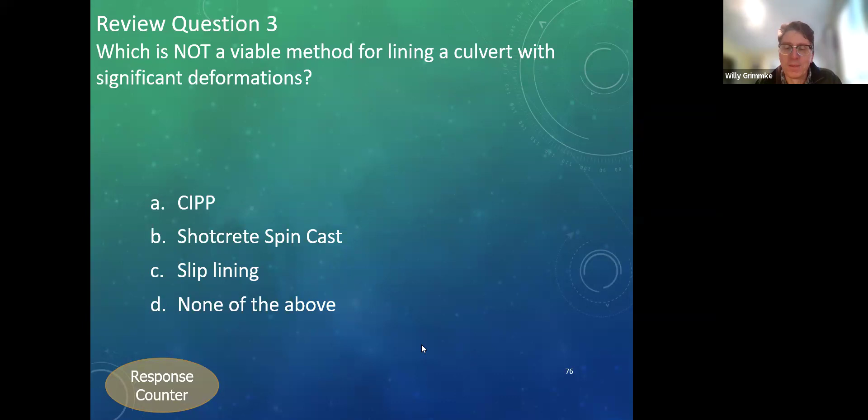Looks like no more questions. Okay, you're off the hook.